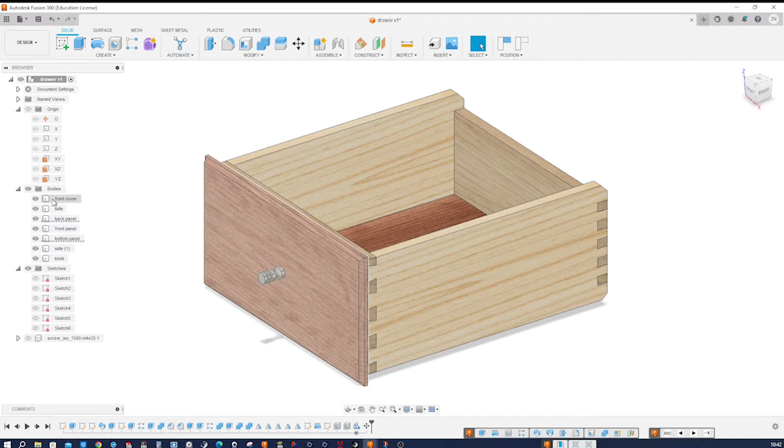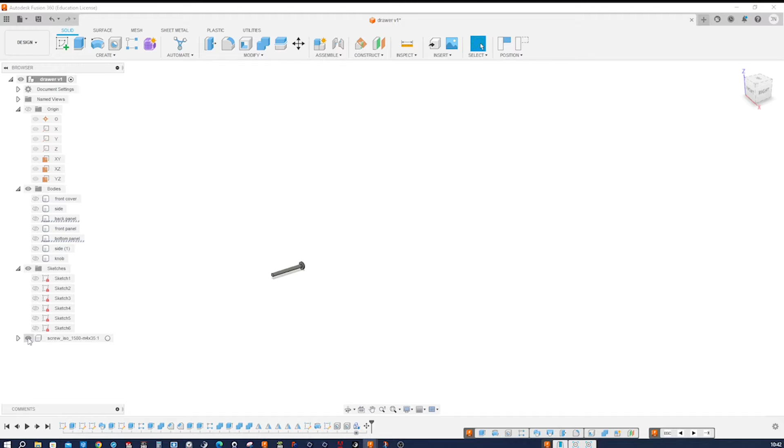Let's have a look at the parts. So we got these bodies, front cover, I will hide that. Then we got one side, we get the back panel, we get the front panel, the bottom panel, the other side, finally the knob, and then we get one screw for that knob. All right, let me show everything.

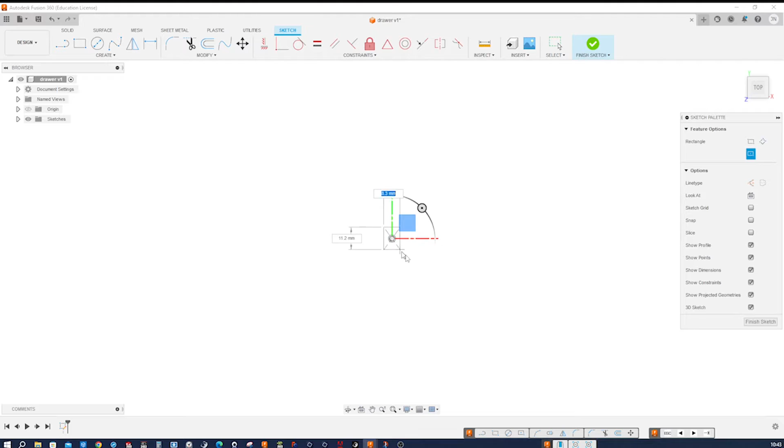So let's get started. I will be working in millimeters for this tutorial. We will start with a sketch on the top plane with a center rectangle and dimension that rectangle with a height of 296 and a width of 258.

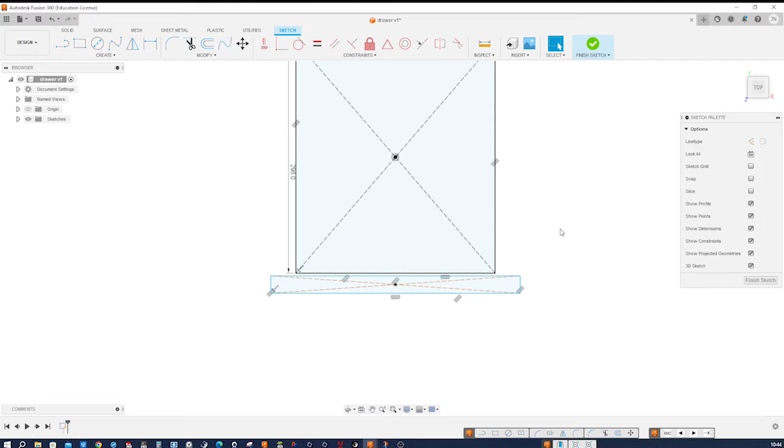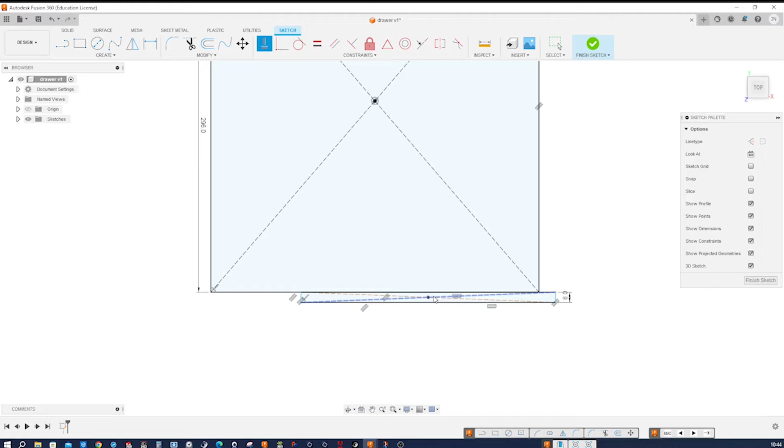Then we'll draw one more rectangle, center rectangle here. Connect that here. Give that a thickness of 8 millimeters. Pull that out. Give it a vertical relationship between those 2 points. Pull that out one more time. And an overlap of 8 millimeters.

So that is a top view of what will be the front cover panel and the outer dimensions of our drawer body. I will apply, pressing O, an offset, no chain selection. I'll take that back edge and offset that 12 millimeters. Do that one more time for that edge. Again, 12 millimeters. And then one more time with that edge going up minus 12, minus 16.

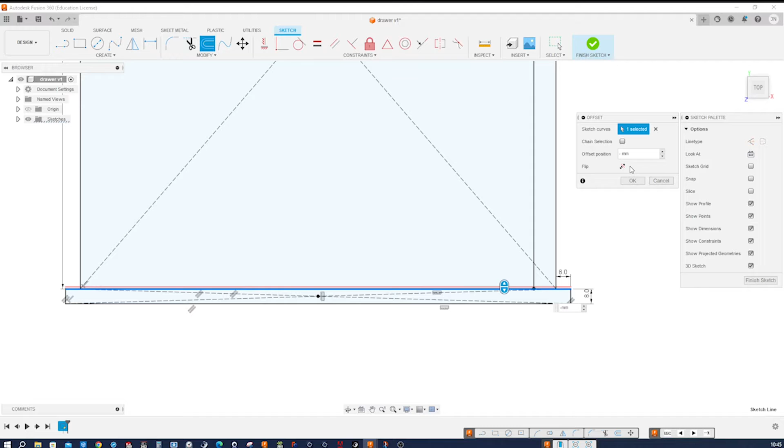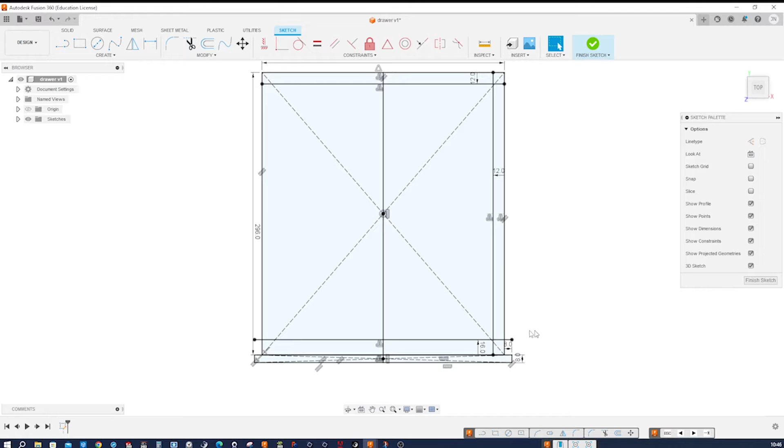All right, so things will be symmetrical on this body. So we will just work on the right hand side of it and then mirror everything across. So that's it for the first sketch. We can cut that off here and finish.

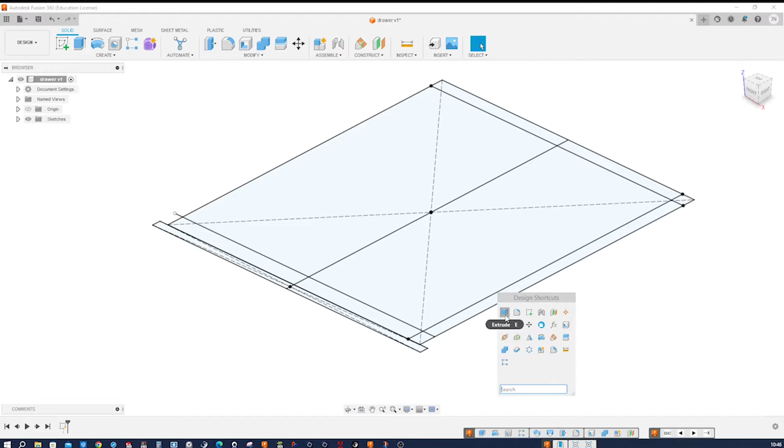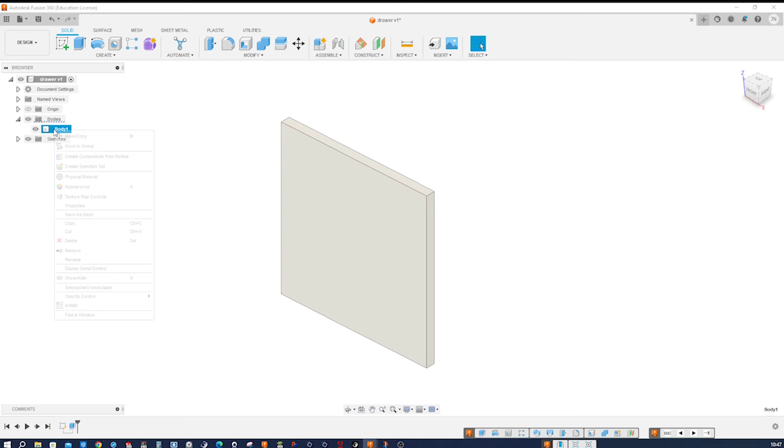I'll get into an isometric view. And the first extrude will be that front panel cover here. We'll be going up 133, a two-sided extrusion, and going down 7 millimeters. Okay, so there's our bodies folder. I will call that front cover panel,

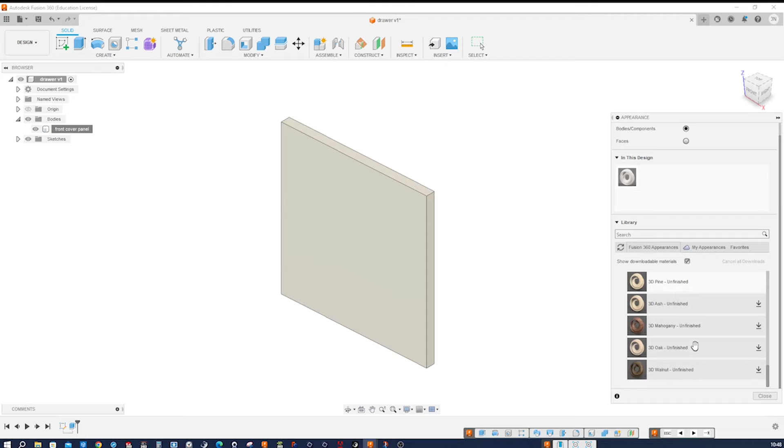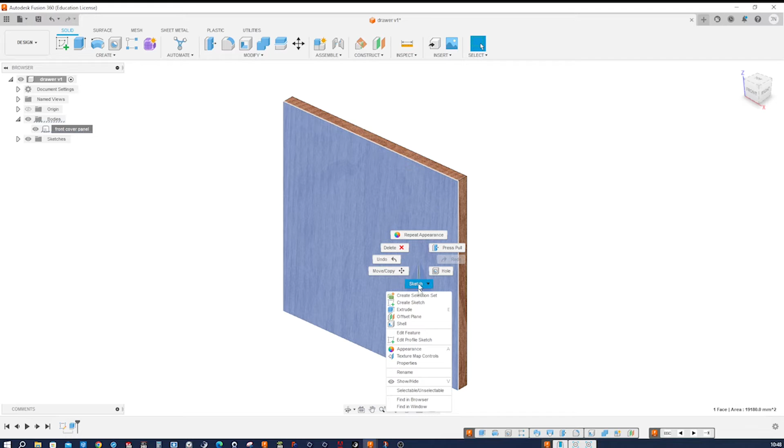and apply some appearance. There is the solid wood folder. Let's scroll down, go to unfinished, and apply cherry here. Close that, and that is not the way the grain should be running. It should be horizontally, right? So I make a right click and go to texture map controls and take that handle here and just go to 90 degrees. And there it is. Our front cover panel, at least half of that.

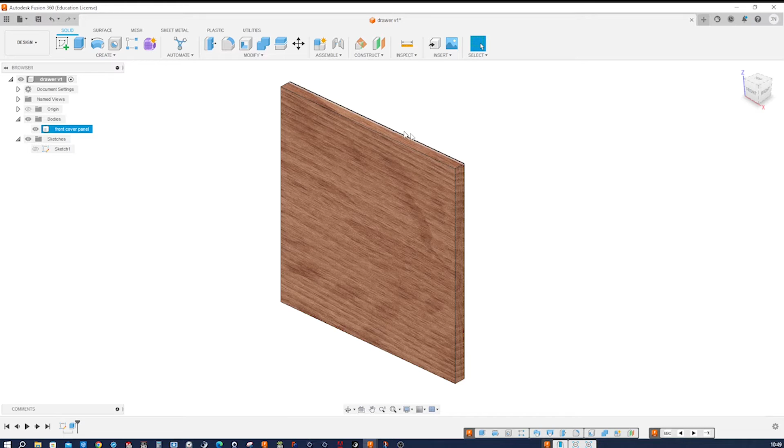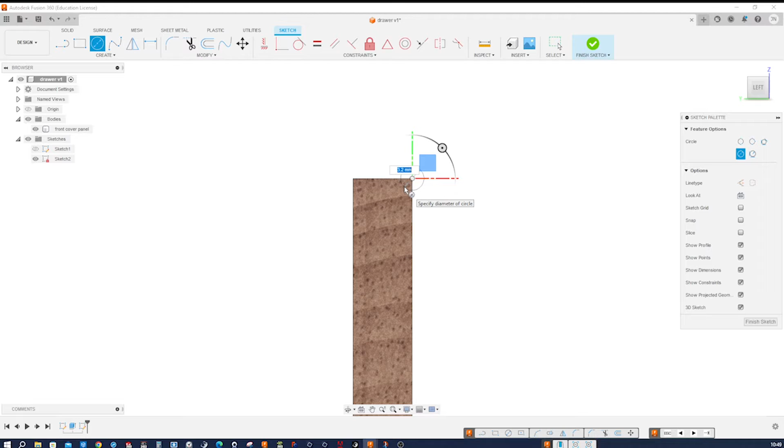Okay, let's route on that front panel. So I'll go here to the side, start a sketch, circle, connect that to that outer edge here, give that a diameter of 8 millimeters. That'll be the profile for our sweep. Start a new sketch on that face with a P. I project that edge, and that edge. 3 selected, okay, and that's it for that sketch.

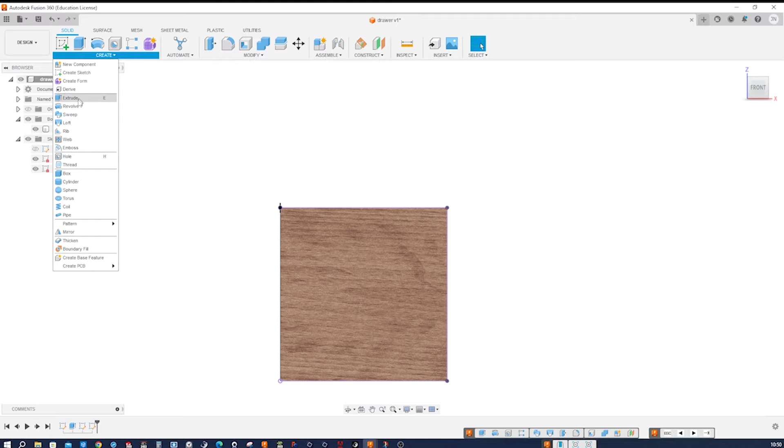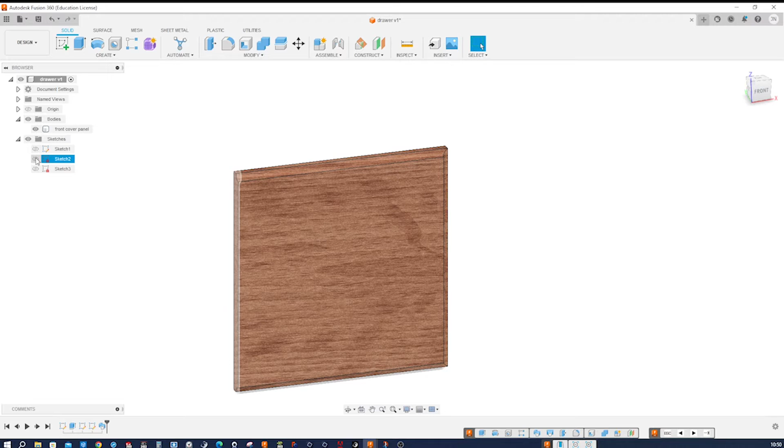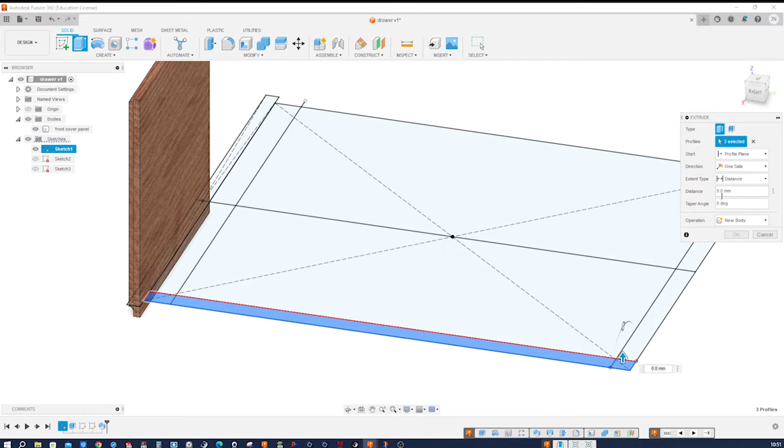Now I go into sweep, take that profile here, path is that one, the operation is a cut, and accept that. All right, now I'll make that initial sketch number 1 visible again, and extrude that side panel. So I take these 3 here, and extrude them 125. This will be a new body. I accept that

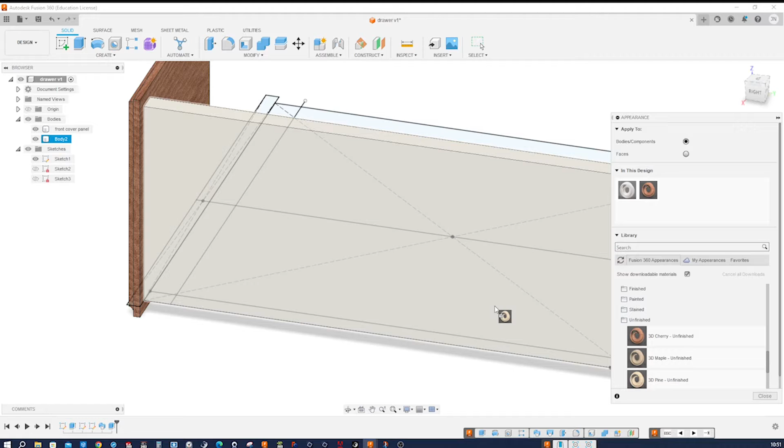and apply again some wood texture. Maybe that 3D pine here. Apply that. Okay, and this time the direction of the grain is correct. And now let's define our joints between back and side and front and side, and the channel for our bottom panel.

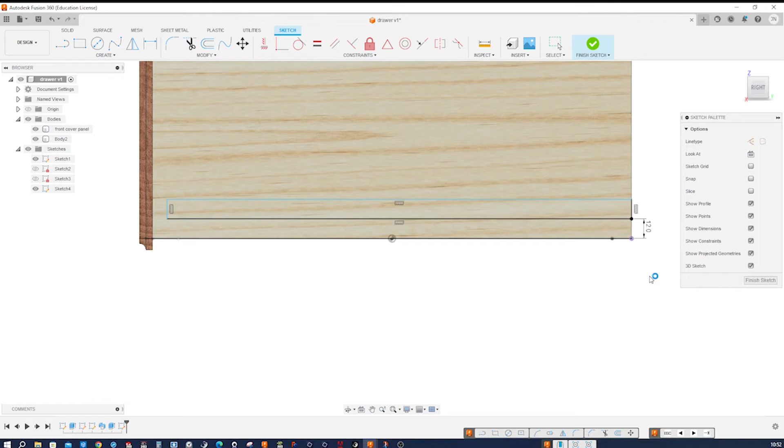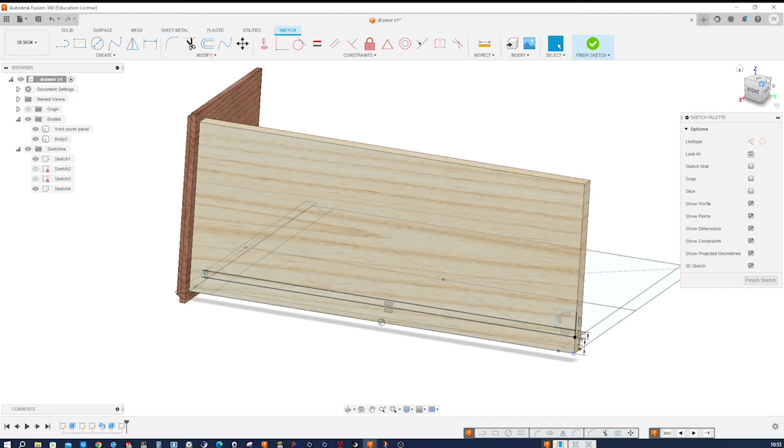So I start a sketch on this face, start with a 2-point rectangle, pull it over there, define a distance to the bottom of 12 and a thickness of that of 5 millimeters. And I will define one more rectangle here for our finger joints. I'll switch to an isometric type of view and apply a vertical constraint between these 2 points here, and a height of that finger joint of 10 millimeters. We just need one.

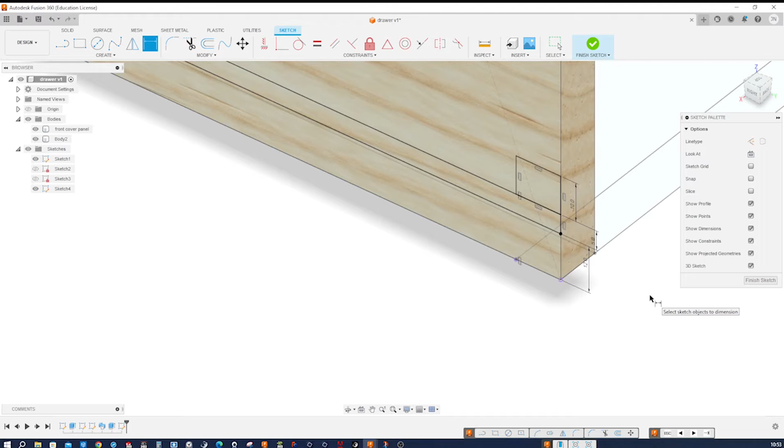So in the front, we need to define how far that bottom panel is going to be in the front panel. So I take these 2 points from the 2 sketches and apply a 4 millimeter distance.

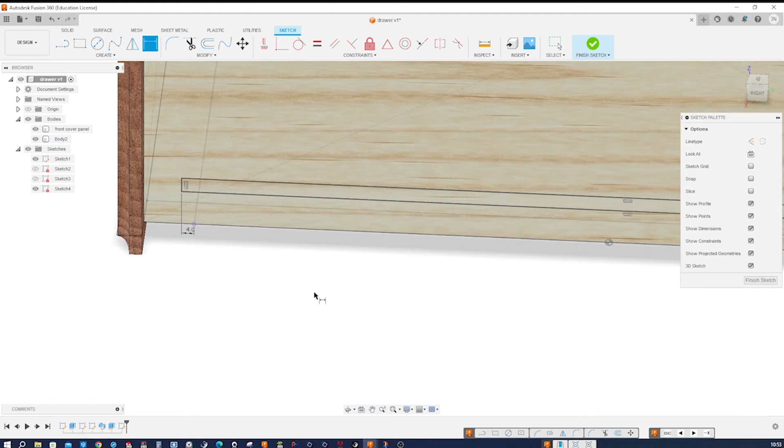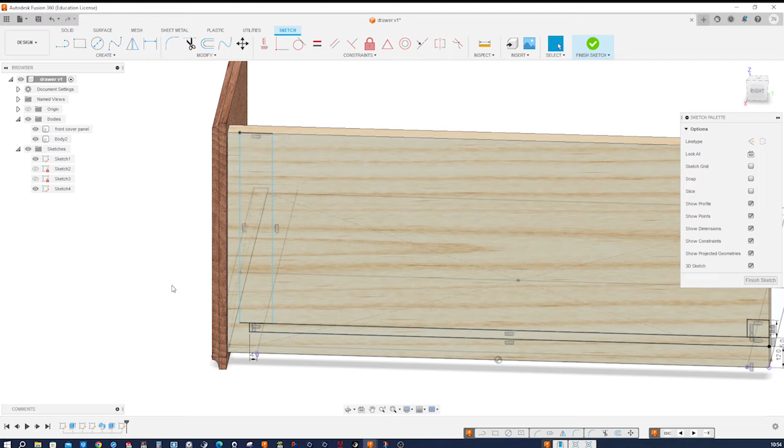And next is that dovetail definition. So there are many ways how to define dovetails. Let me start by drawing a rectangle here. I'll show you my technique here. So these dovetails are going to be half covered, which means there's going to be a front part where the dovetails don't enter.

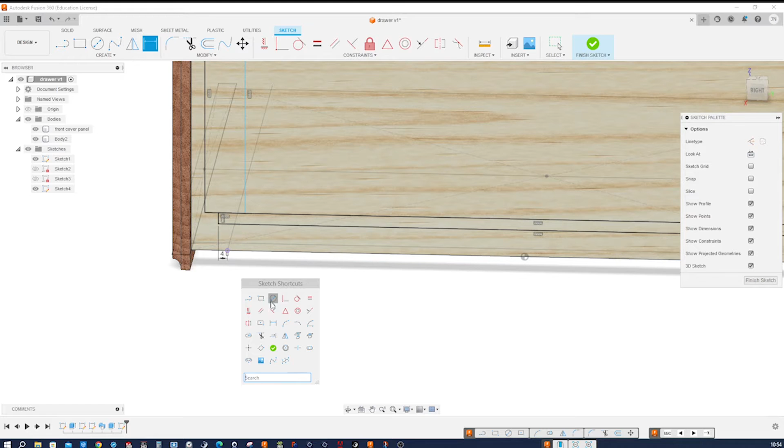Let me define those here with 6 millimeters. And sure, the dovetails start where this sketch point is. So I take that one, all right. And then I draw, pressing L and X, one construction line going here from the midpoint down. And then I need 2 points here and here. The distance is 8 millimeters, 2 times.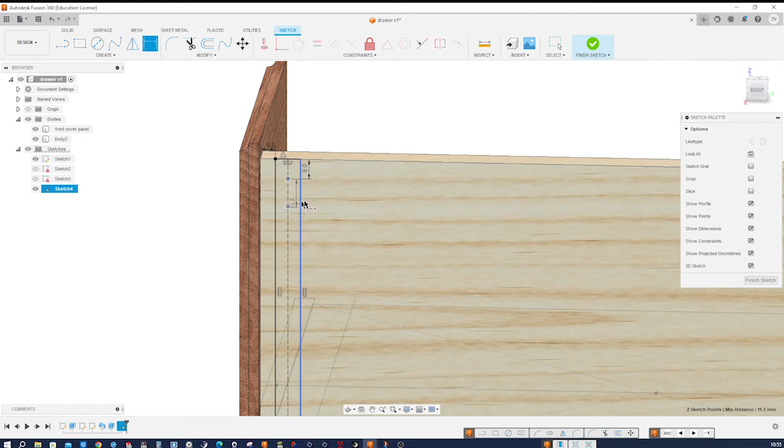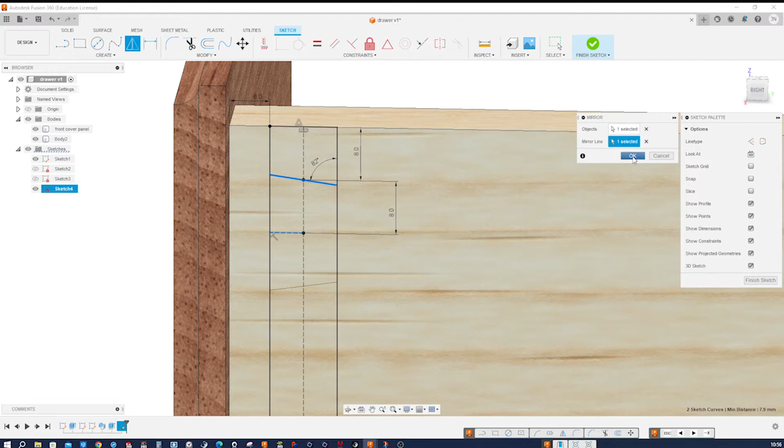And then I draw a line at an oblique angle here. That'll be no construction line. That will be an edge. Coincident with that point and at an angle of 82 degrees. Then I need one construction line here. Press X and mirror that object, that sketch line, over that line. Okay, and that's it for that sketch. I exit.

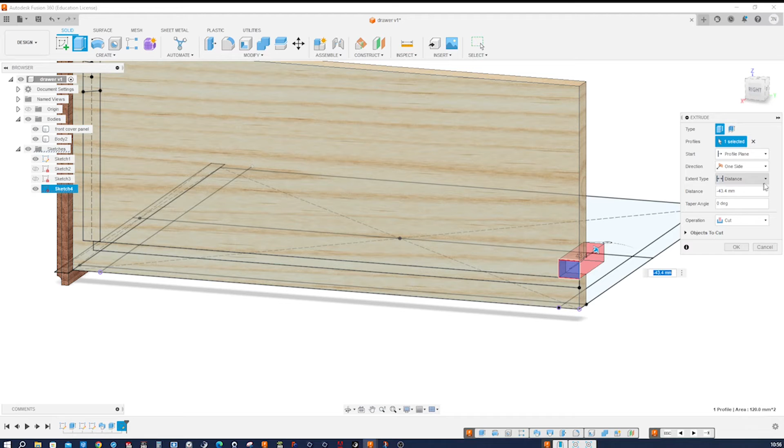First, I'll make the cutout for the finger joint. So E for extrude. Take that, go over there. Distance to object. Take that backside. Cut. That's it.

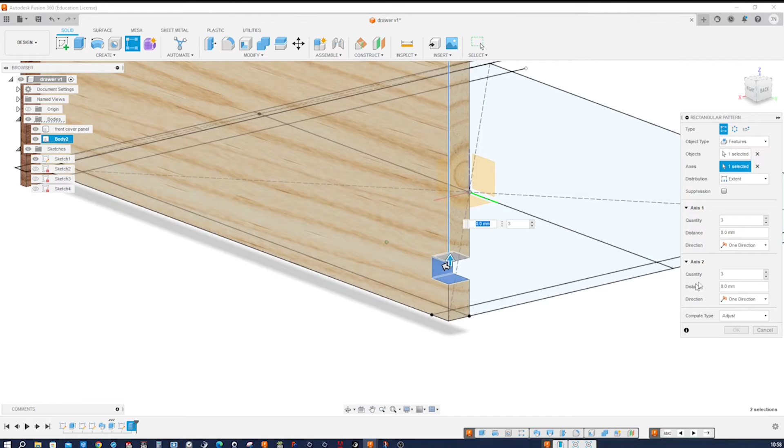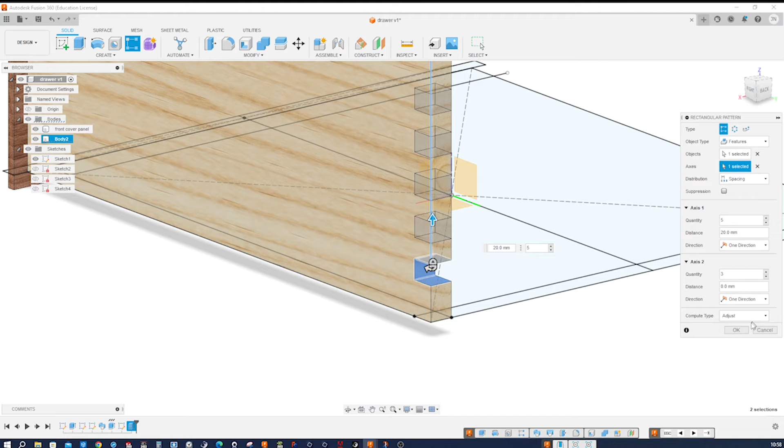Now let's make a rectangular pattern of that feature. Click that in the browser window. Click the axis, that edge. Go to quantity 5, distance 20, and that will be spacing 20. Okay, I gotta rewrite that, 20. Okay, so there we got our finger joints.

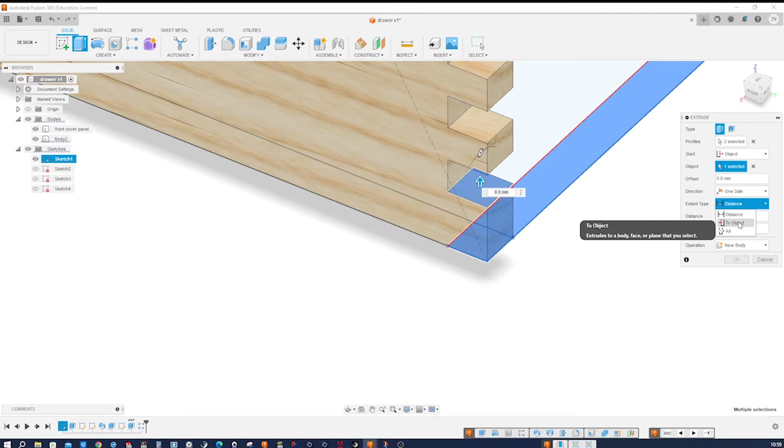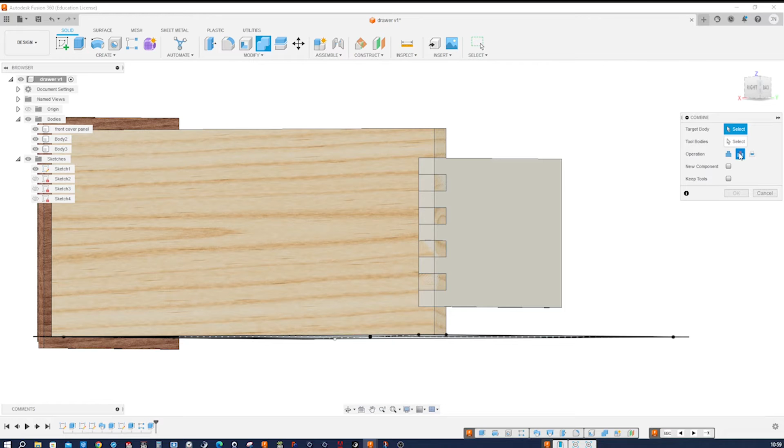Now let's model the corresponding back panel. So I take this region and that one and start from that face and finish on that one. That'll be a new body. I accept that. And now I will make a boolean operation. A cut on this body with that, and I'll keep the tool.

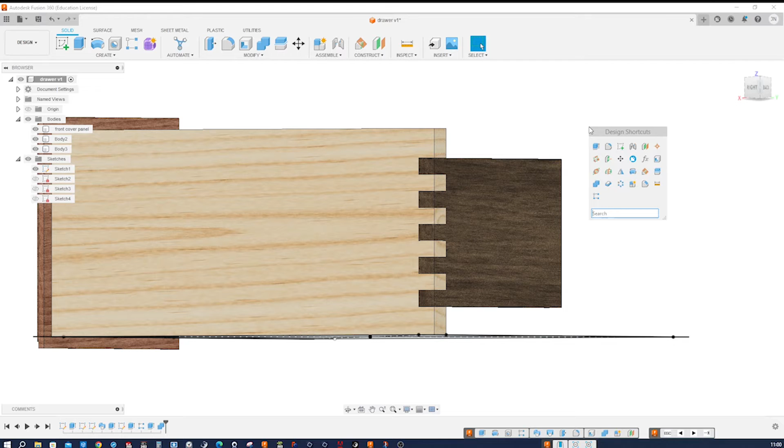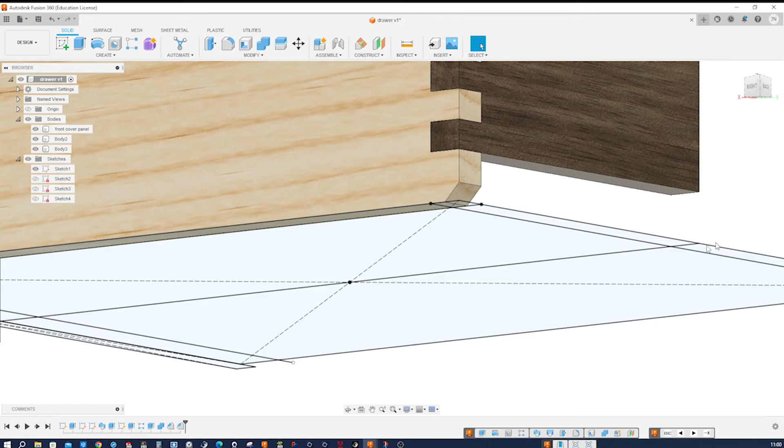There it is. Let's apply some other appearance to that. Walnut, unfinished. I'll download that. Apply that. Let's apply some chamfers to these edges here. That'll be 8. And at the bottom, that'll be 6. Okay. Next extrude is the front cover. So I take this profile and that one, extend to object up to here. That'll be a new body.

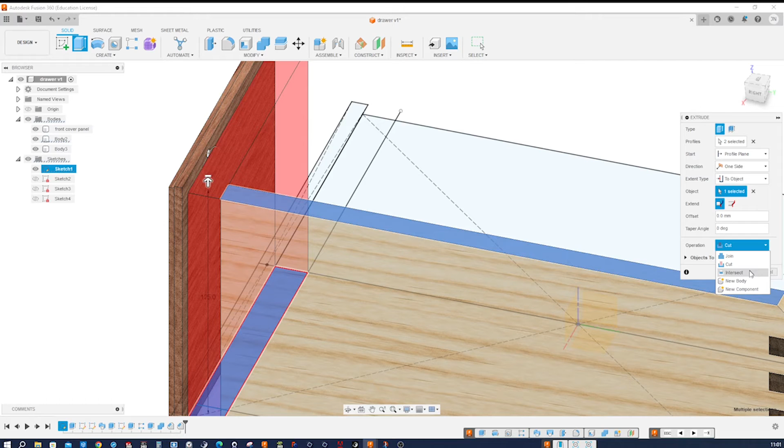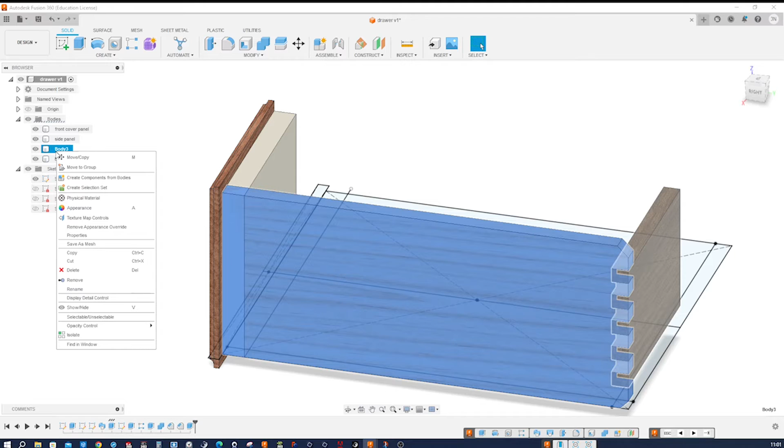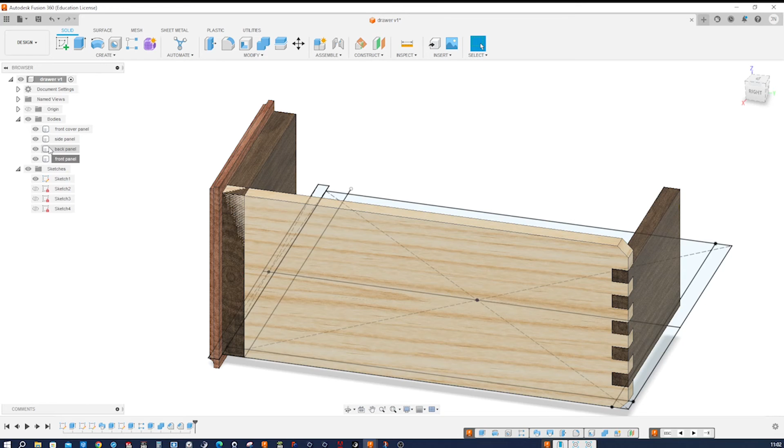Okay, let's do some naming here. So this is rename side panel. This is the back panel. And this is the front panel. And again, I'll apply that walnut appearance. Let's hide the side panel for a moment and make sketch number 4 visible.

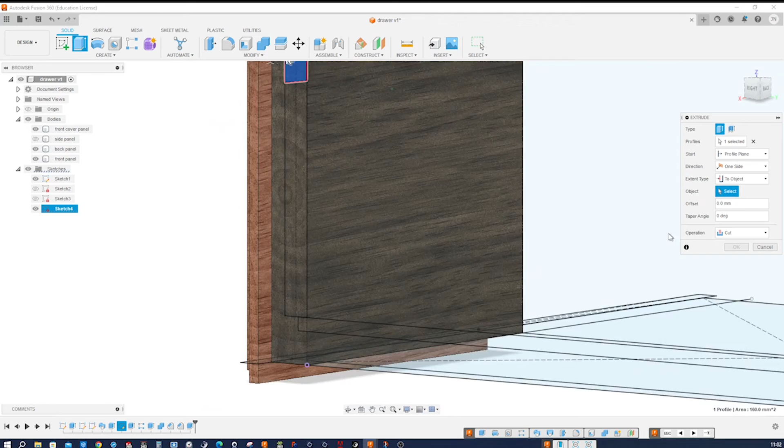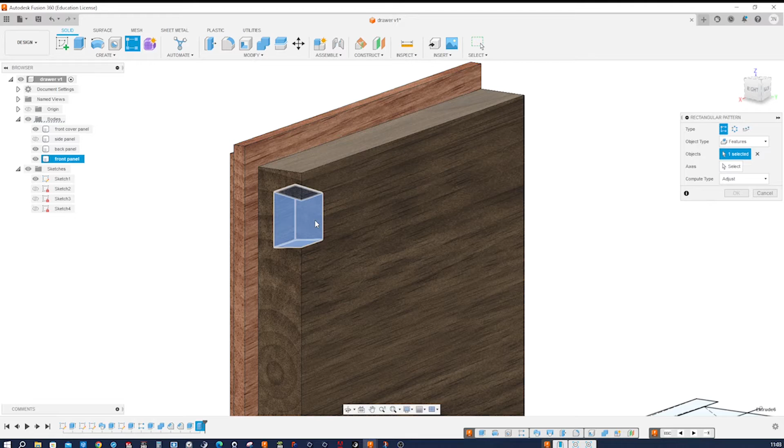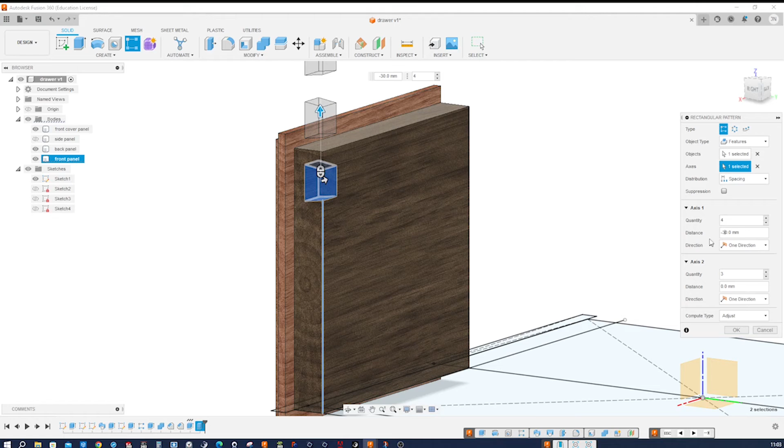I'll zoom in and make another extrude of that region here. Going in, extend type, we'll go to object and pick on our base sketch that corner. Accept that and make another pattern. I'll hide that sketch. A rectangular pattern of features. That one. Axis is this. We need 4 instances, and the distance is -30. No, not minus, but plus. So there it is. Okay. There are our dovetail recesses.

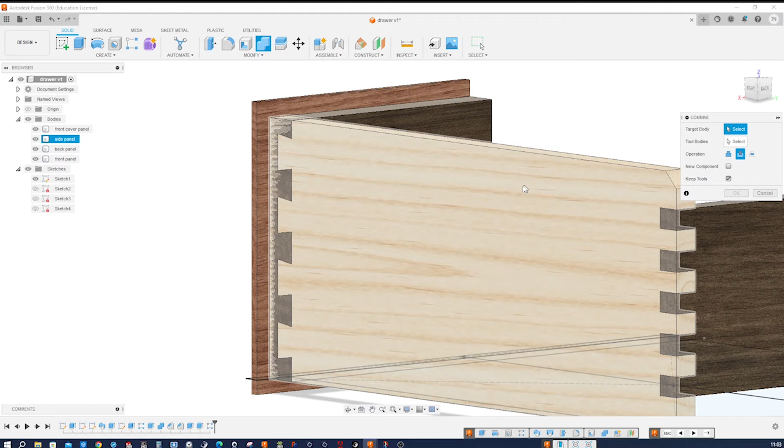Now let's show side panel again. Go into the boolean. We want to apply that to that target body. That is our tool body. We keep the tool, we cut in there, and there it is, our dovetail.

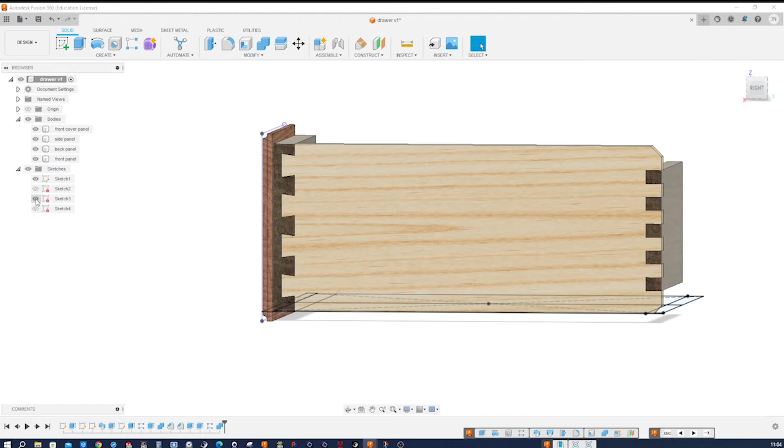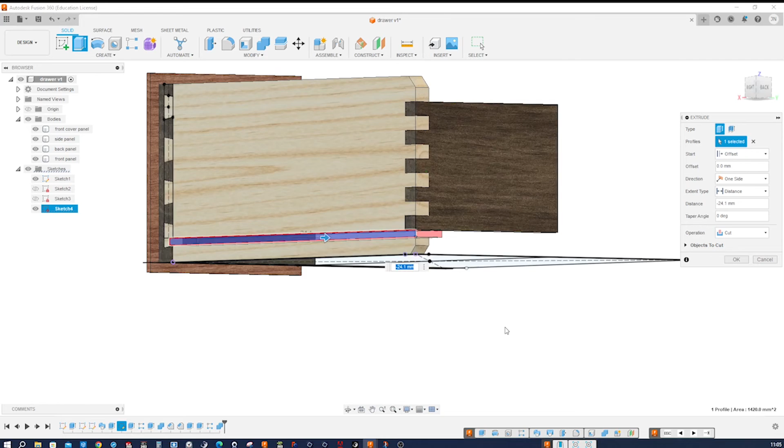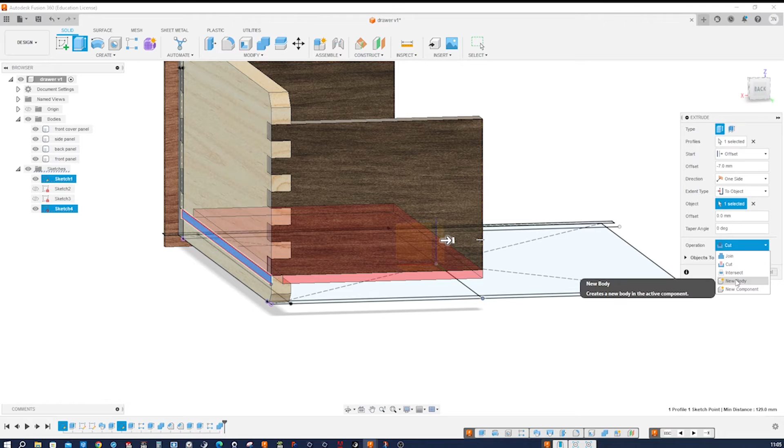Next, let's define the extrusion of the bottom panel. So we need that sketch number 4 it is, huh? So I press E, take that region, go into offset in that direction. Offset distance is 7. So it's -7, okay. -7. It's a one side to object. And we can take that vertex down there. And this will be a new body. And we accept that.

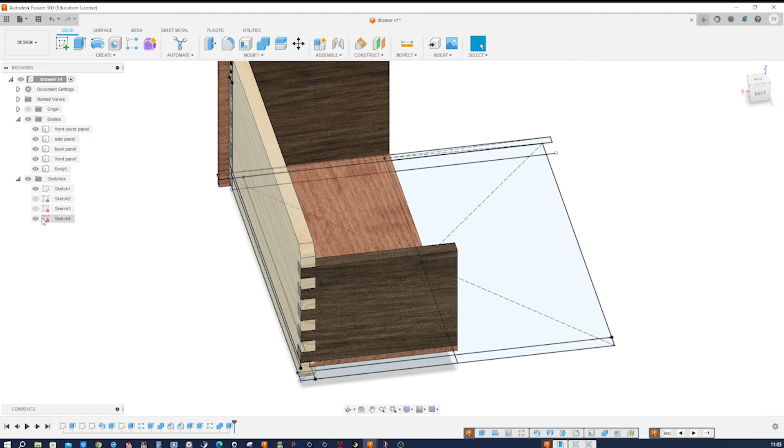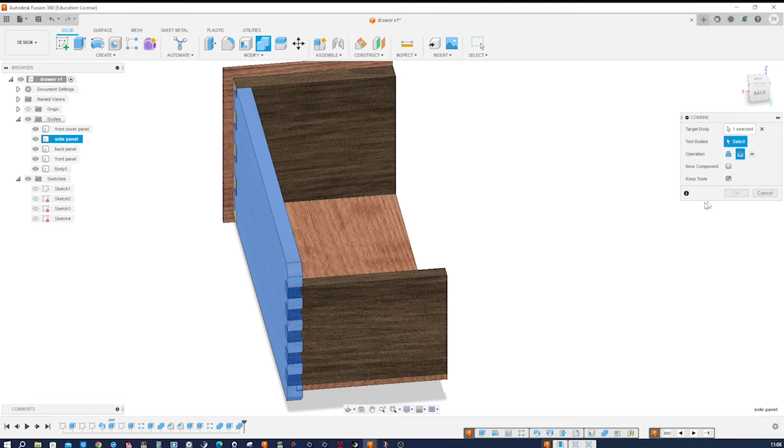Again, let's apply an appearance. I'll take the cherry, close that, and let's hide that sketch number 1 and 4. We need to apply the Boolean operation. Target body is this, tool body is that, and we keep the tool. One more time. Target is this. Body is the bottom panel. And there we have half of our drawer, huh?

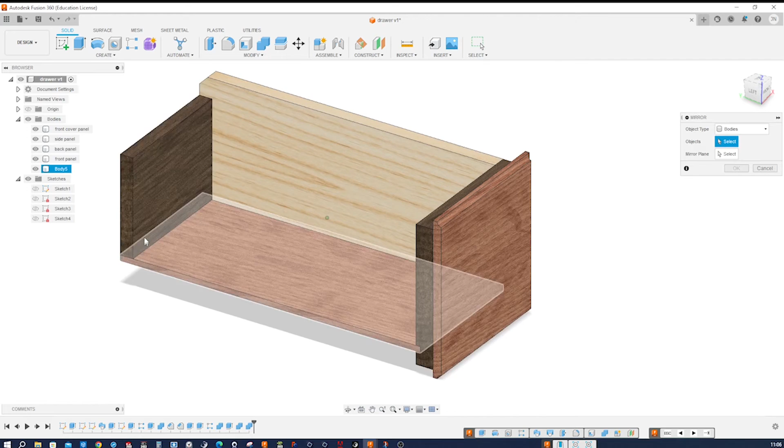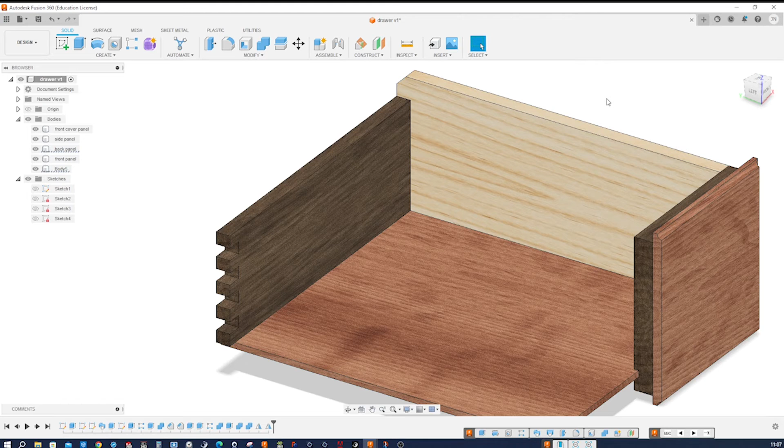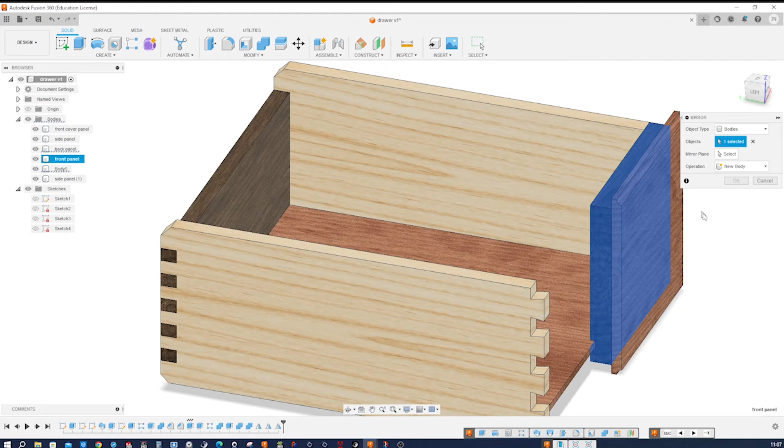So let's mirror the parts. I'll start in the back. Take that. Mirror plane is this. Joining. Yeah. One more time. Mirror the bottom. Mirror plane there. Joining. Then let's take that side. Mirror plane, this one, and that will be a new body, huh? Then mirror, take the front panel, select the mirror plane, joining, yeah. One last time. That one, over there, yeah. So we get all the wooden parts of our drawer finished.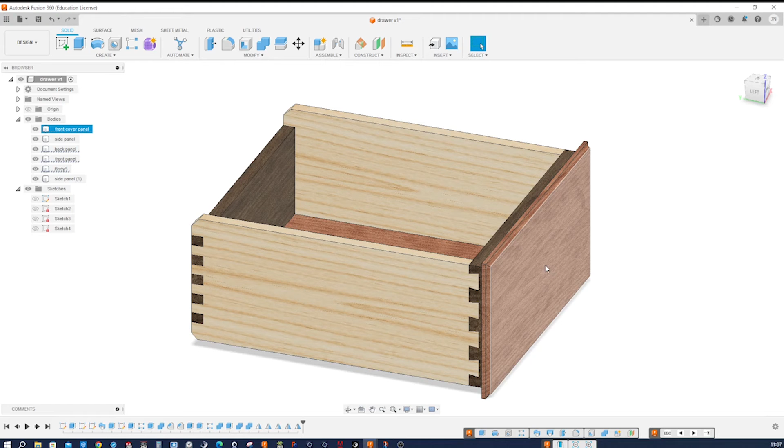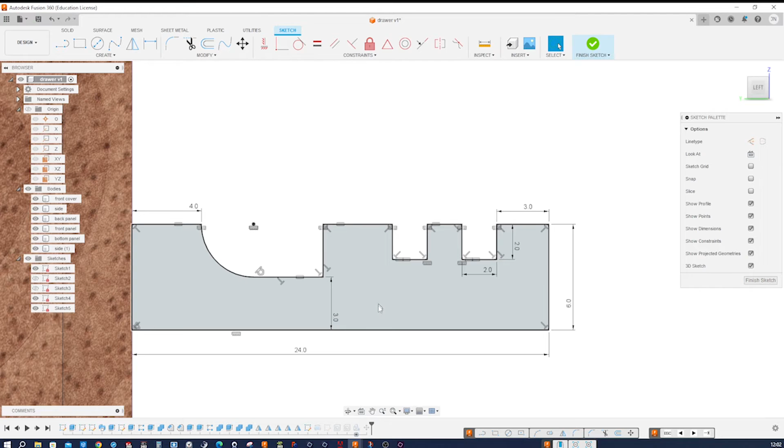And now we can draw a knob. This part I'm leaving to your creativity. If you like my knob, I'll just show you the sketch of that. Here, there's a sketch which is revolved around that axis here. And there you have it, a beautiful wooden drawer designed in Fusion 360.